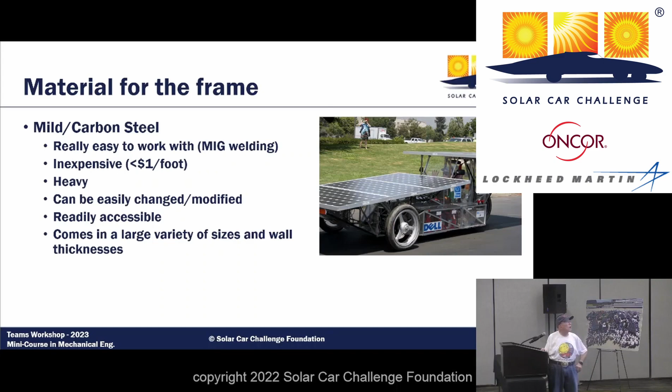Sometimes your steel is heavy, but maybe not that much more, and it may be worthwhile. It's easy to modify - you can cut something out and refix it. And you've got all kinds of varieties. Here's a car that's made with carbon steel.

Another type of frame can be made with chromoly, which is a more sophisticated, a little bit more expensive material to use, but it's lighter weight, easily modified, changed, and comes in large varieties. If you can find a supplier in town that deals in chromoly, go to them and do what Joel says - ask them for a donation. They may not be able to give you money, but they probably have some materials left over from another project which they can donate to you.

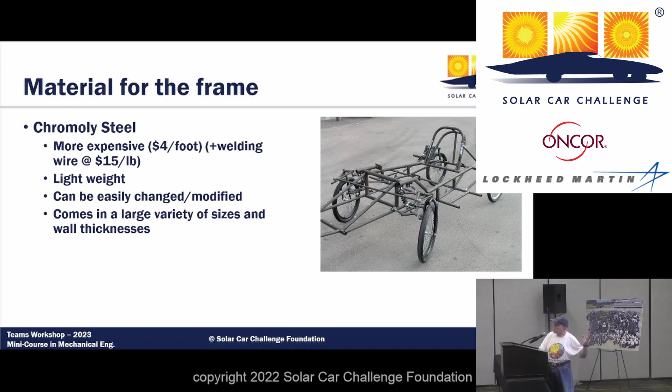So chromoly builds you a lighter car, but it's still strong. What about aluminum? Many cars are built out of aluminum - stiff in its weight, harder to weld, generally tubular, has a resistance fatigue to it, which means it tends to, at some point, start wanting to give on you. That's where you bring in extra pieces of aluminum, you duct tape things together. We were going across Australia at an earlier time with a car where the aluminum tube was bending so much, we had to duct tape other pieces to it because of the fatigue. But it is what many of the teams will use, and it can be difficult to repair unless you have duct tape.

Carbon fiber - many teams will start building this, and Joel is the expert on this because they actually built their most sophisticated car using carbon fiber. You have to learn the technique. This is not a first car project - it's after you're a little bit more sophisticated with what you're doing, because it's a major thing to build out of this. And once you've built a composite material frame, you can't easily fix it. It's there. You've got to have planned ahead where your batteries are and all that kind of thing. It's expensive, requires careful planning, and is hard to repair.

How about building the frame itself, the roll bar and crush zones? We've changed our terminology - instead of having a roll cage, it's now a safety cell. And this is a rigid protection encompassing the entire driver, with a minimum of 5 centimeters clearance to the driver. So your safety cell has got to be from every driver 5 centimeters from them, so you've got a little wiggle room. And if something were to bend, it's not going to bend into your driver.

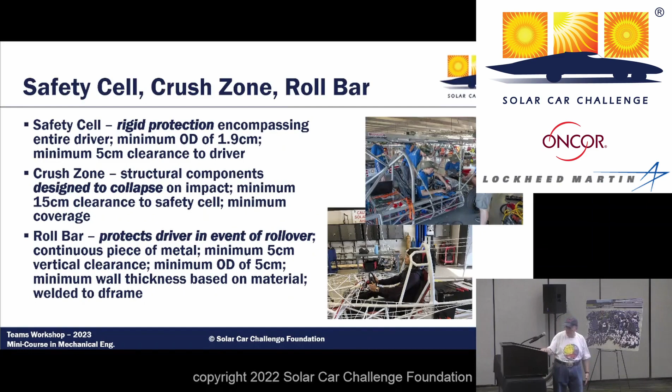Here's some good examples of that roll bar. You see on the left, sufficient vertical clearance, and notice a continuous piece of metal in the side view there - that makes a good roll bar. And you notice that they've got this additional member added on here, so that the roll bar is not going to collapse. That's really an intelligent way to handle your roll bar.

Your crush zone is designed to absorb the impact of a collision, protecting the driver from front, side, and rear collisions. You have a minimum of 15 centimeters of horizontal distance from all parts of the safety cell. This is new - if you're building a new car, it needs to comply with this. From your safety cell to your crush zone, it's got to be 15 centimeters horizontal distance from the parts to the safety cell. That means it's going to be able to crush in that much before it gets to the safety cell. In 2025, it's going to become more rigid, but if you're building a new car now, you need to follow the guidelines.

If you raced in 2022, then you can be grandfathered into using your old car until you build your next car, which is before 2025.

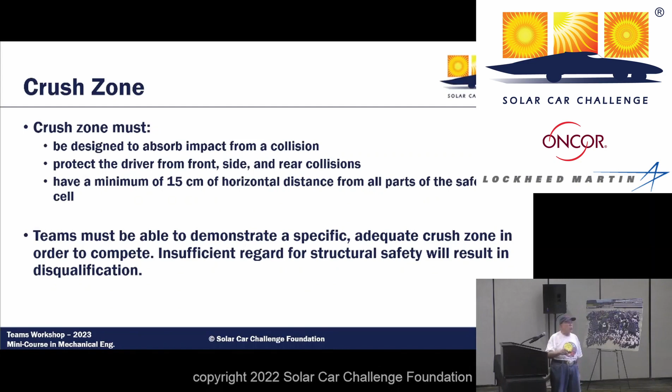But this is designed to build more safety in. Your crush zone is designed to absorb impact and protect the driver. Most importantly, during scrutineering, your team must be able to demonstrate a specific, adequate crush zone in order to compete. Your team has to be able to do that.

Here's the new drawing. You can see here, this is the safety cell, and here's the crush zone. Notice the crush zone has to be up to 15 centimeters now, so if somebody's driving towards you from the side, there's something to intercede between them and you.

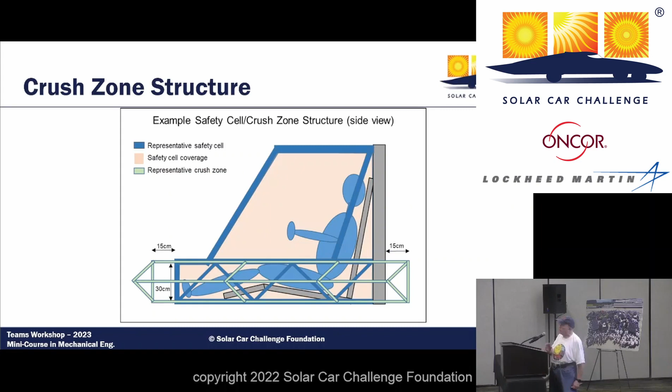We've actually had cars in the old times where we used to joke that you could drive an 18-wheeler through the side of the car and never touch anything but the driver. So we want to make sure there's something that's going to be able to absorb an impact. Do we think there's going to be an impact? No, we don't. But we've got to prepare. We've got to make you the safest we possibly can, because you never know what's going to happen.

Here are additional drawings showing the roll bar. Now this should be saying safety cell, crush zone.

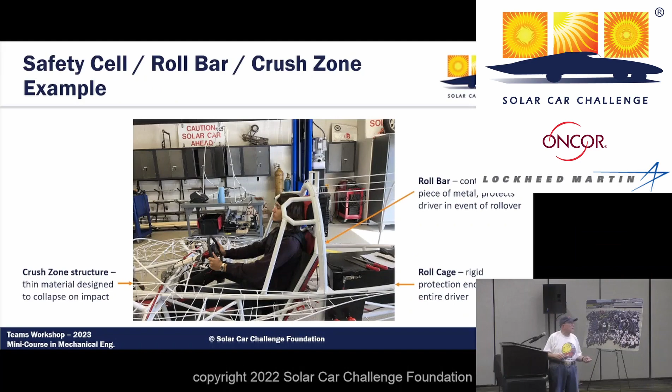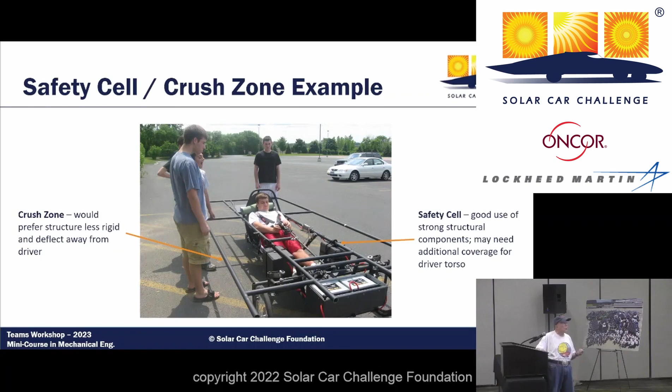Okay, let's talk about suspension and steering. Common suspensions are a MacPherson strut, the single A-arm there.

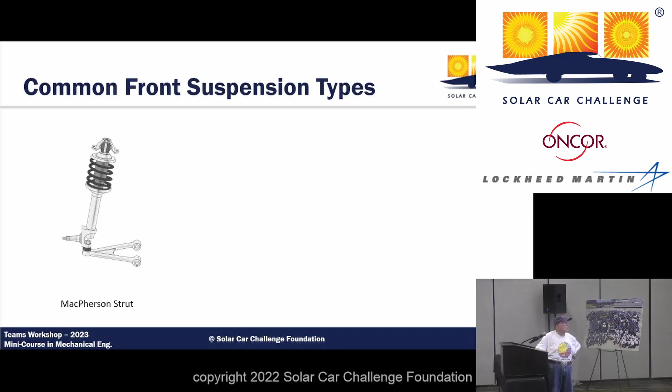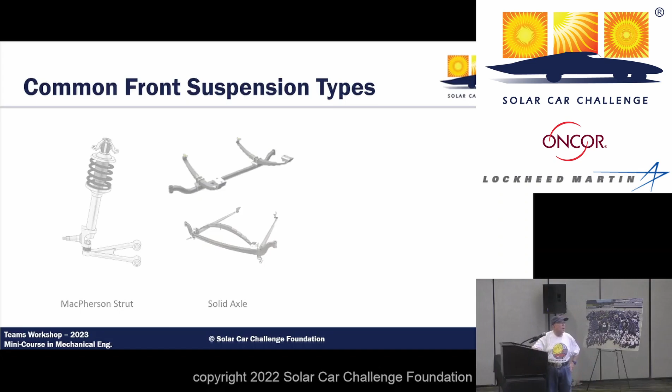You've got your solid axle. Interesting, our first car we ever took to Australia had a solid axle. It worked fine. Of course, by the time we finished, the car had so torqued that we could never use that frame again. But it worked. For our first car, we were just proud that it was able to get through with it. And then you've got the double A-arm, which seems to be sort of a favorite of solar cars because it makes the steering and the math that it takes to put this together more sophisticated.

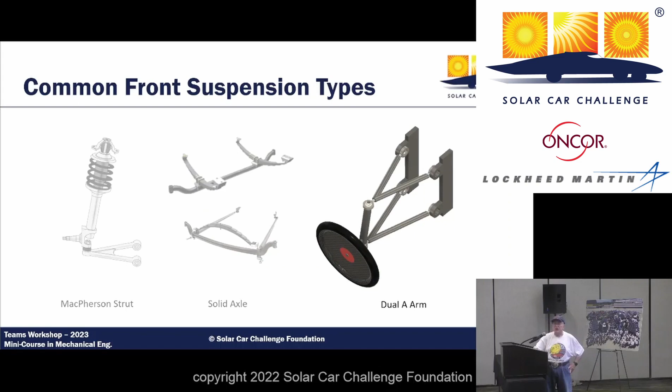Notice the diagram there. We'll go into steering geometry in our January workshop. I didn't want to touch on that now because it would throw too much at you and people would get glassy-eyed wondering about it.

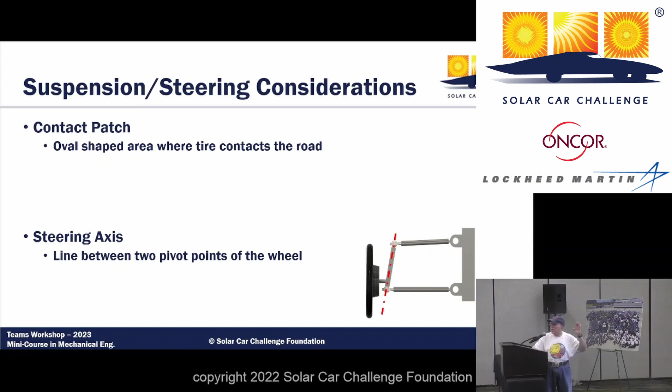What you're thinking about with your wheels and suspension is what part of that wheel is going to touch the ground. You want to minimize that contact patch so you have less friction. So the better your car is set up with proper camber and caster, you're going to be in good shape.

What about wheels and brakes? To me, I like a lighter weight wheel. The problem with a lighter weight wheel is sometimes you're going to have more blowouts.

We got real sophisticated. We used some of the fancy wheels that were used by some of the college teams. I think, Winston, you had some of the old wheels, and that required about a $100 tube to go on that wheel. And if it was not properly aligned, you'd lose your wheels. In one of our first races at the Speedway with that wheel, in one session between 9 and 12, we had 9 blowouts because it wasn't properly aligned.

Larger wheels seem to be easier to align, with less blowout. They're more durable. But then you're carrying more weight, and you have a bigger patch on the ground, which creates more friction and reduces your capacity to drive at a faster rate.

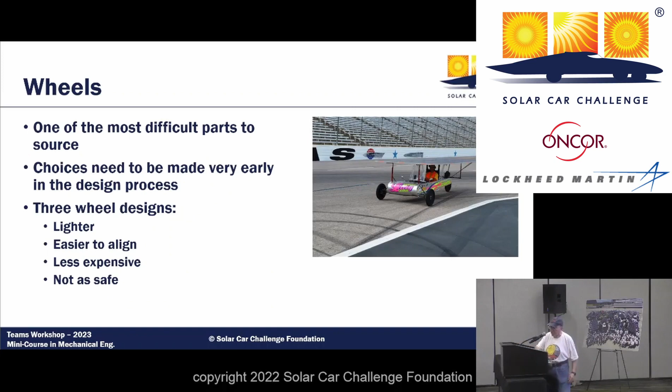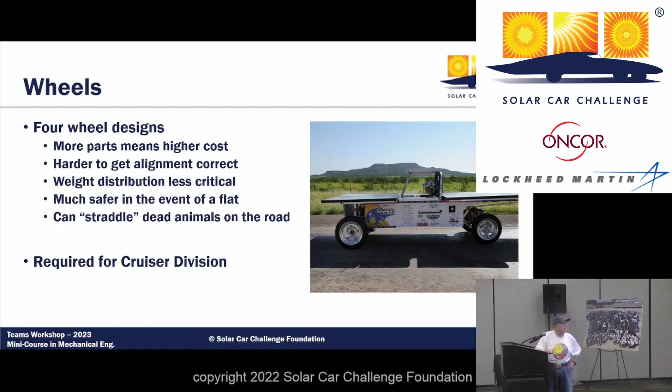Here's a 4-wheel design. Again, the idea is that it gives you better protection in the event that you have a blowout. It's required for the cruiser division.

Here's that fancy wheel, milled aluminum, that was used by some of the college teams. Or you can get something that's filled in. I recommend something that's pretty well supported so that you're dealing with the lateral stress as well as the vertical stress. That's what many teams forget about. That's why many teams, including myself, don't use bicycle wheels, because bicycle wheels are not intended to be stressed on the side.

They're meant to be stressed vertically. But a solar car, when it goes around the corner, puts huge stress on the wheel. So you need to have the material that wheel is composed of capable of withstanding that stress. That's why solid wheels of some sort seem to work well.

Or if you're using a heavier motorcycle tire or hot rod tire or something on that line that's got greater support, you'll be able to take care of that.

You don't want to change your tire, particularly if you're on a cross-country race, because you don't know what kind of environment you're going to be in. Am I going to be having to roll the car off into the grass? What's in the grass? Are there fleas? Are there ticks? Are there snakes? Whatever it might happen to be.

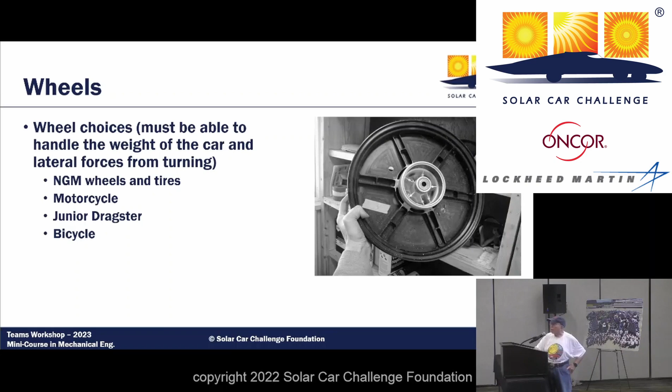Luckily, we do our best to try to make sure that there's a good shoulder on the side of the road so you have some room there. But you just never know when you're going to have a blowout.

Here are some varieties of larger wheels that seem to work well.

Your brakes - you're going to need 2 separately operating brake systems on the car. Each is going to have a separate pedal. 2 separate operations. You can't tie the 2 brakes together. You've got to have a separate pedal for each one.

You cannot use a motorcycle brake. You cannot use a bicycle brake. It's got to be a foot pedal type of braking system. You can't use something that you printed out in a 3D system - it gives way too quickly. We found that out this year. We need something really substantial. So when you hit that brake, that's your brake.

Because of experience, on one of our first cars, we were required to drive across Battery Park in the New York area on the solar car. And the judge said, drive this as fast as you can to test the brake. So we drove as fast as we could to test the brake. And the weld broke and the brake mechanism flew, taking the driver off the car.

So my braking system's going to work? Yeah, it will work if you have a backup. So you've got 2 systems.

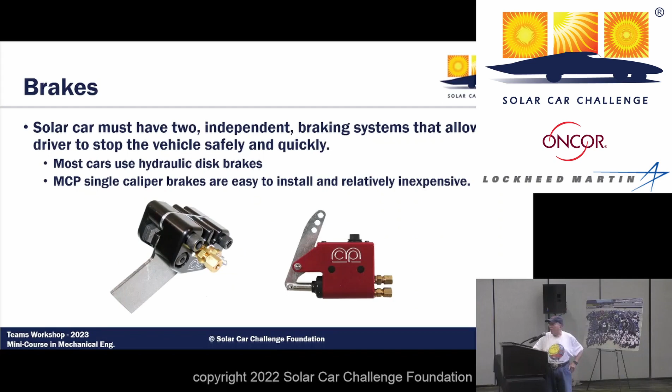Many teams will use a hydraulic system, although an actual physical brake works, except you can't throw an anchor out the back of your car. And a hand brake doesn't work.

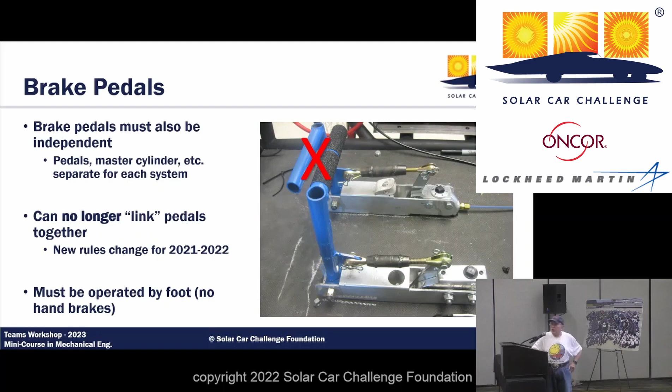This is a picture showing one not able to be used anymore - you see the X across it. Here you had one pedal that operated 2 systems. Can't do that. You have to have 2 separate braking systems.

And then you're going to have braking tests that are going to be pretty sufficient. We have a test - can you drive at a certain speed and have your car come to a stop? Are you able to control it? And then we take you out on the track and you go as fast as you can, route around the track.

And then hit the brakes. Does your car maintain control? If it fishtails, it means that you're not able to control it.

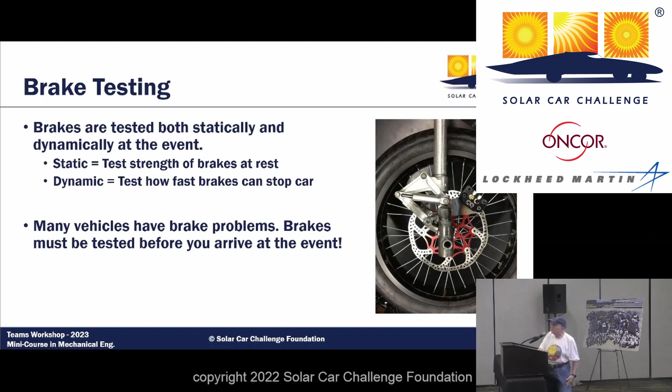So that's our mini look at this.

To talk about his experience in mechanical engineering and share his interesting comments here.